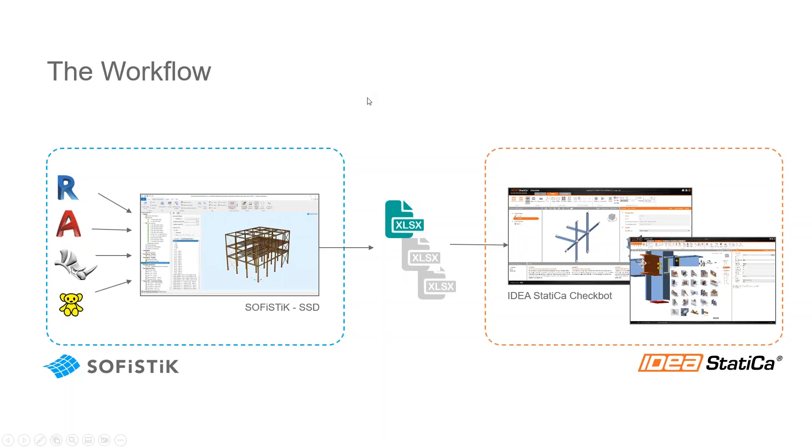As already said, the exchange format is the Structural Analysis Format, SAF. It's a format which was set up a couple of years ago, I think 5 years ago, based on an initiative of the Nemetschek group to facilitate the cooperation between structural engineers, mainly led by the software vendor SCIA. And the focus, in contrast to IFC, for example, is entirely on analytical models, to exchange analytical data between analysis softwares.

So, for example, you can define analytical beam members, shell members, surface members, together with boundary conditions, loads, results, all you need to do an analysis. And what we really like in that format is that it is based on Microsoft Excel. So you can already read that data, and you could also modify that data if you want to. There's also an extensive documentation, so if you want to check the transferred information, you can check that documentation, which describes all the parameters and information in more detail.

So what will be transferred to IDEA in that specific case for doing the connection analysis? It is materials, of course. You need section information, so the cross section. Then you need the linear members, either of the full geometry or of a partial geometry, with all the properties and geometry. You need load cases and the forces along the member. So that's what we are transferring to IDEA StatiCa. We will see that later in detail.

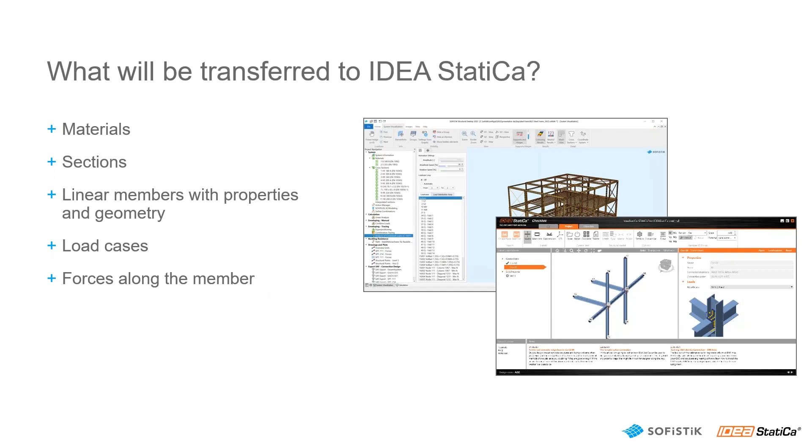Let me say some words about materials and sections. Basically, if you use standard materials and standard sections, they will be automatically recognized in IDEA StatiCa. So we defined a number of steel profiles here, and these steel profiles will directly show up in IDEA StatiCa Checkbot on the right-hand side. And of course, you could also modify them later on.

Also, a question which is asked quite often: eccentricities of the members will be considered. You can define eccentric members in SOFiSTiK, either through an eccentric cross-section or by defining eccentricities on the member itself, and all those eccentricities will be transferred to IDEA and recognized there. But it's also possible, and I think you will see that today, to modify the eccentricities. So you can do an analysis with centric positions of all the members in SOFiSTiK and then add eccentricities later in IDEA.

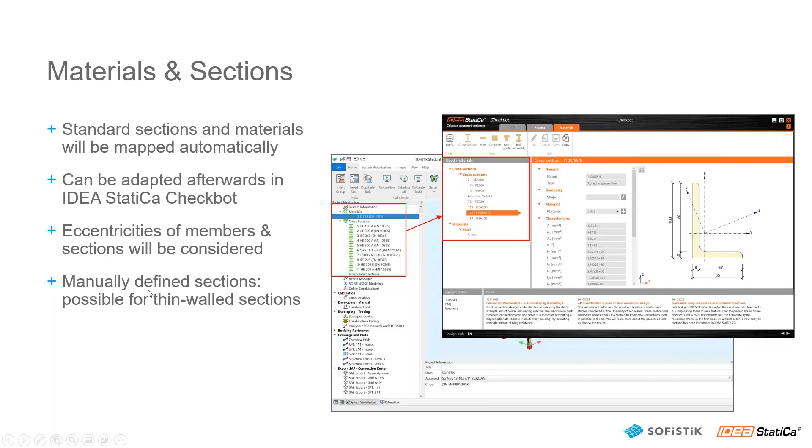And what we think is interesting, especially when you work with SOFiSTiK, is that you can do very complex geometry and sophisticated nonlinear analysis, for example grid shells. In those cases, you might not always use standard profiles, so you might want to define your profiles manually. In SOFiSTiK, we provide a number of options to do that. We have a graphical preprocessor where you can model any profile, like this composite profile, which has been put together from a couple of HEB profiles.

That kind of profile can be transferred to IDEA, but there is one thing you need to consider. In SOFiSTiK, we provide two ways to analyze those profiles: the thick-walled definition and the thin-walled definition. Thick-walled means you define your profile by the outer boundary, and the analysis is performed based on surface integrals. But you can also define profiles using lines which are welded together, and the analysis is done on line or curve integrals.

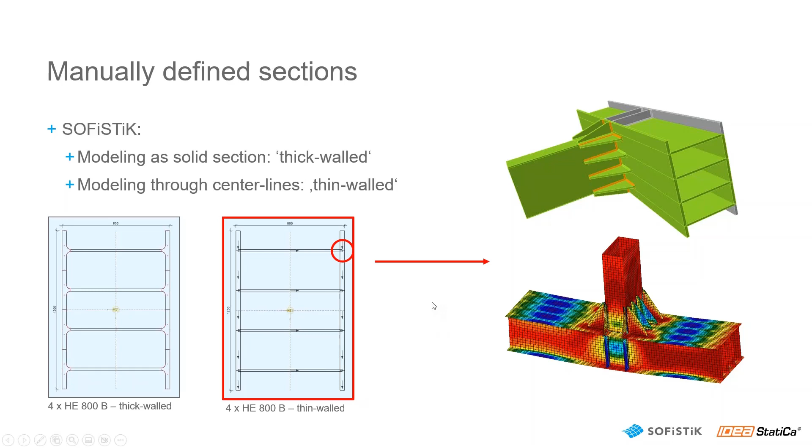For IDEA, if you want to transfer that data, right now only thin-walled sections can be used. So you need to consider that when you want to transfer complex manually defined sections to IDEA. But if you do that, any kind of shape is possible and can be designed in IDEA. So I think that's a pretty nice feature.

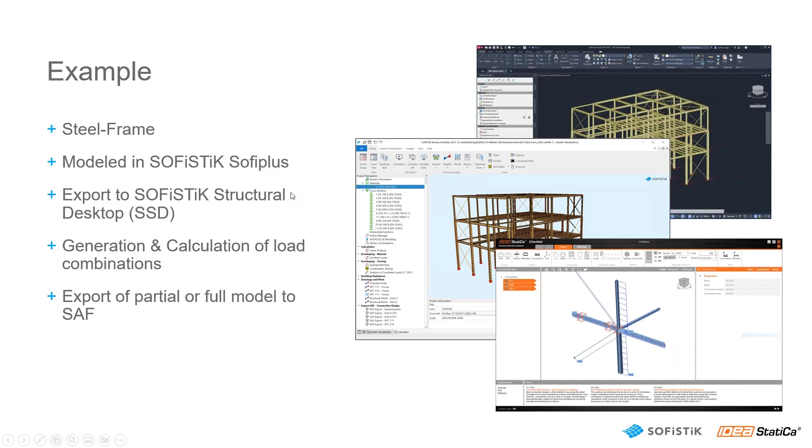So I'm already through my PowerPoint slides, and I'm switching now to the example. The example I want to show you today is a steel frame which we set up here. We modeled that steel frame in SOFiSTiK SOFiPLUS, and then I will show you how you can do the combinations and later on export that data to the SAF format.

So let me switch to SOFiSTiK SOFiPLUS. So this is the preprocessor. I already set up that structure. So you see here all the members, and I'm just switching to 2D wireframe view. And let me just select one of these members. And then you can see the properties of that member.

So for example, the cross section here is assigned, and we also have beam hinges, so moment hinges, so they are not transferring moments on that specific member here. So all that stuff can be modeled in SOFiSTiK SOFiPLUS, of course. Also, we already set up a naming to the members so that you can find them later on.

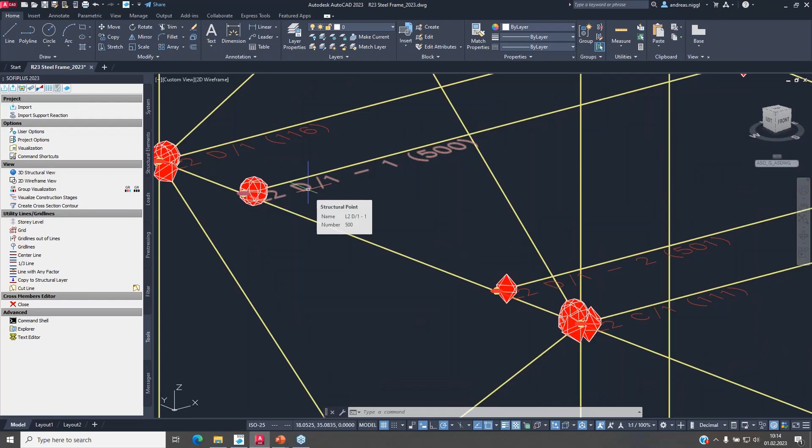So for example, we will see later on one of those interior nodes will be transferred to IDEA. So I think this is this one here. That node here will be then transferred to IDEA StatiCa.

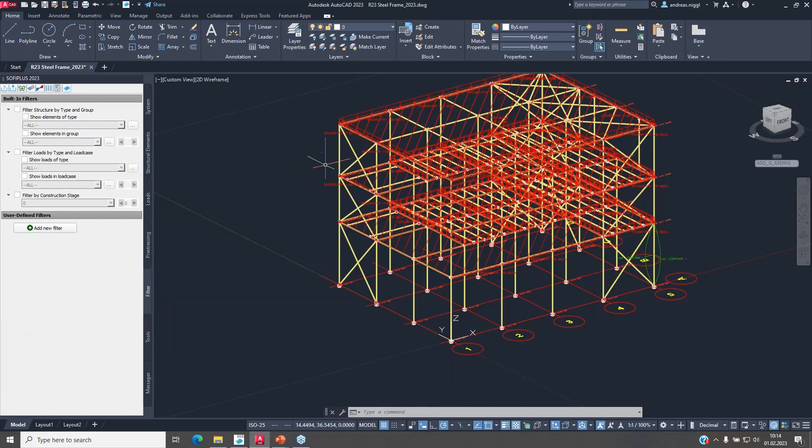In addition to the structure, we also set up loads. So you can see here the loads. So we defined self-weight, additional self-weight, live loads, and so on. And as for the live loads, we also defined the live loads in a patterned loading scheme.

So you see here different patterned loads, which we applied using so-called load distribution areas. So you define this load distribution area, which then transfers the area loads to the specific members in SOFiSTiK.

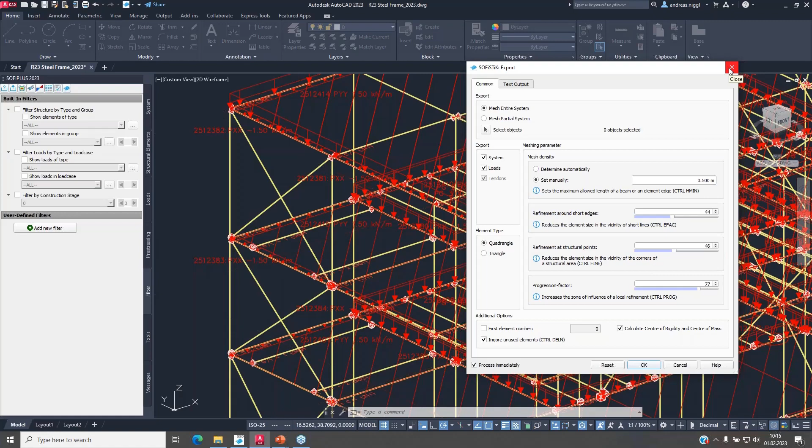And once we set up this structure, we can export that structure to SOFiSTiK Structural Desktop, where you can define the kind of elements being generated, but I don't want to go into detail here. I'm just switching now to SOFiSTiK Structural Desktop, where I already exported the structure, and I also already calculated the linear load cases here.

So you see self-weight, for example, you see snow loads, or you see these patterned loads applied to the members here. But in order to do a design, of course, we need to combine the loads. So we need to factorize the loads to get design forces. And in SOFiSTiK, there are different options to do that.

So you can either do an enveloping, but for this kind of steel structure, and especially when you want to transfer the decisive forces of a specific member, it's better to do explicit load combinations. So we are combining the loads. But before I do that, just a few words on SOFiSTiK Structural Desktop, which you can see here.

So in SOFiSTiK Structural Desktop, the entire analysis is organized in so-called tasks, which you can define totally freely. You see here, we have a couple of tasks for calculation, for doing the combinations, for local checks like buckling resistance. You can also define all the post-processing, so creating drawings or text outputs here. And I will do that later. You can also automate the export to the SAF here using a task.

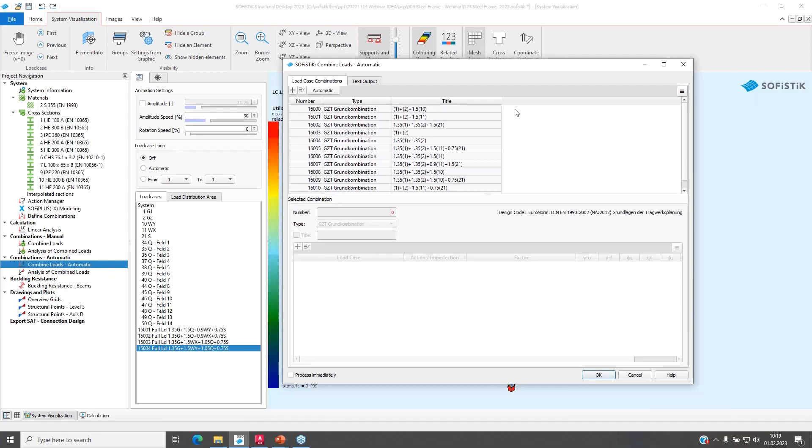So for example, there will be that combination which is decisive for the normal force, for the moments, and so on. So using that feature, you can calculate the combinations which are decisive for a specific node, for example. I don't let this being calculated right now to keep it simple.

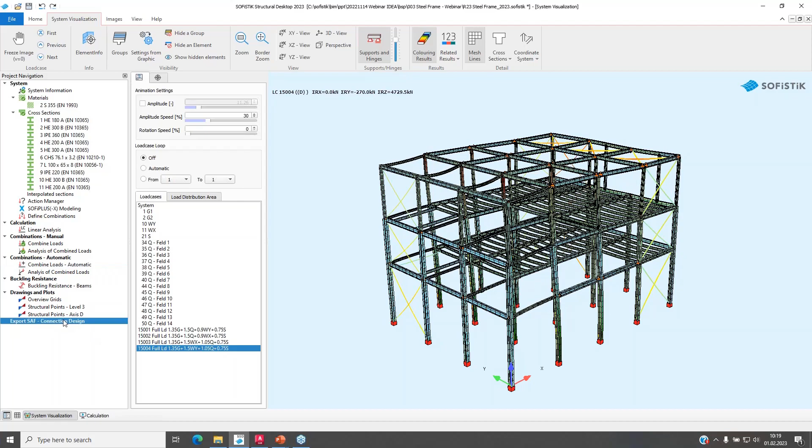Yeah, and once you did the load combinations, you do the analysis, then of course you might want to do some post-processing, but in order to do the design in IDEA StatiCa, you can now add a task, which I do right now, called SAF export. Just let me check out the model. I want to pick this specific member here. Just let me select that member.

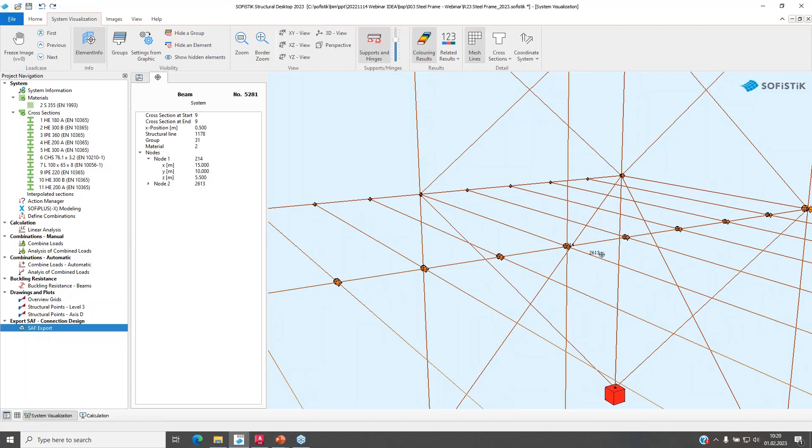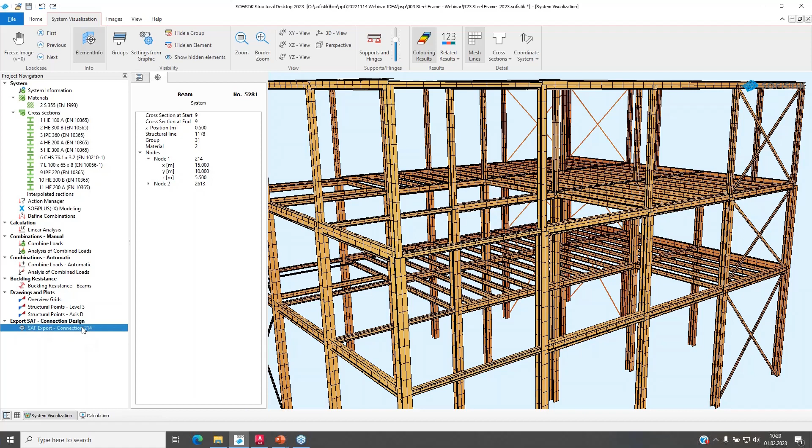This is node number 214. So you can see it here. I'm switching off the supports and hinges. So you see here, this is node number 214. And I will pick now this node number 214 first. So I just rename my task here and double click the task.

And in that task, I can either select the lines being transferred or the points. So I'm using here the points, 214. I can select that point here in that dialog. And then I need to select the load cases which should be transferred. So I'm just using those combined load cases which I already calculated.

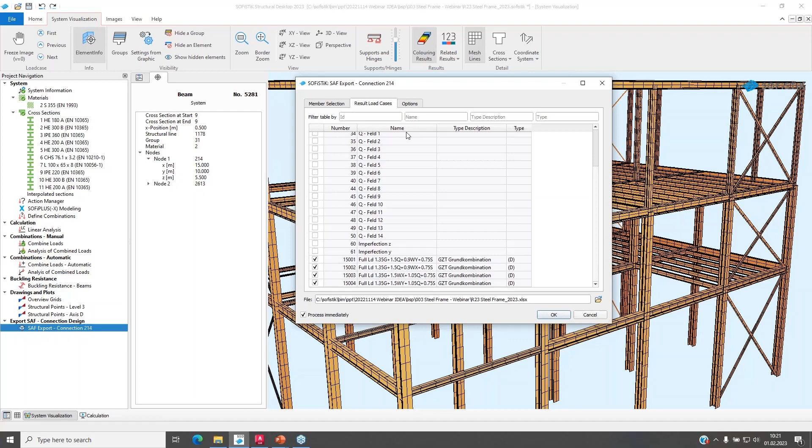And in the options, I can specify what kind of coordinate system should be used in the SAF file, because in SOFiSTiK we are using a different kind of coordinate system compared to IDEA StatiCa. So there needs to be some transfer of the moments and also the geometry when you do the analysis in IDEA StatiCa. But this setting is being taken care of here.

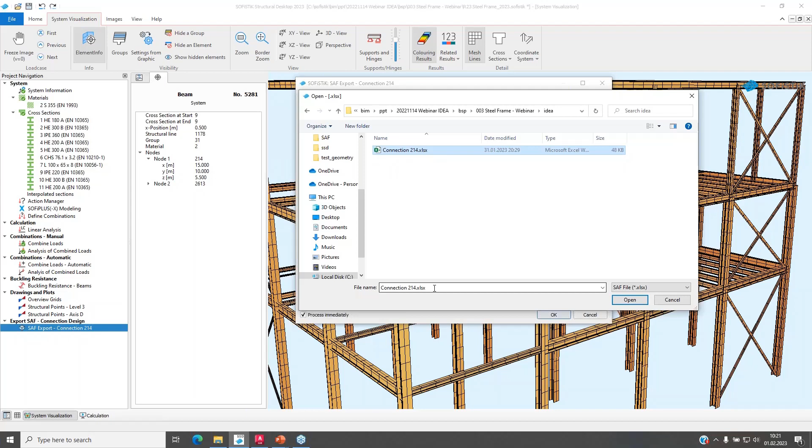And then I need to select an Excel file. There's also an Excel file here, but I select that connection Excel file here, which will be overwritten later, and then clicking OK, the file is being generated. Same can be done. I'm adding another task here for the SAF export for exporting the full model.

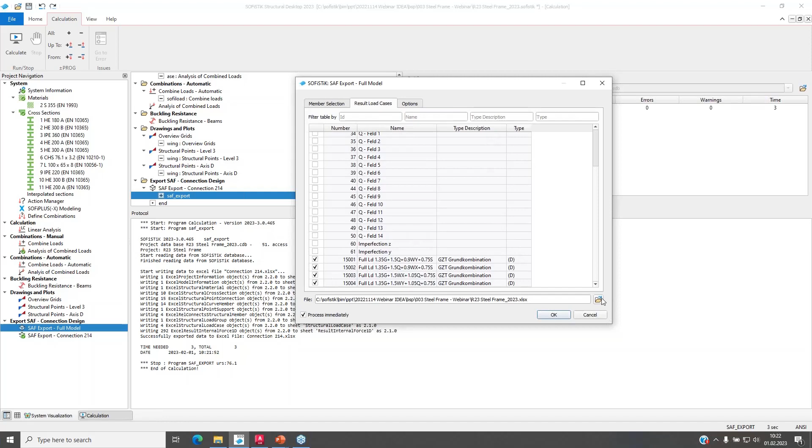So in this case, I'm selecting all structure lines in my system, same result load cases. Options are the same, and I'm just adding here full model.

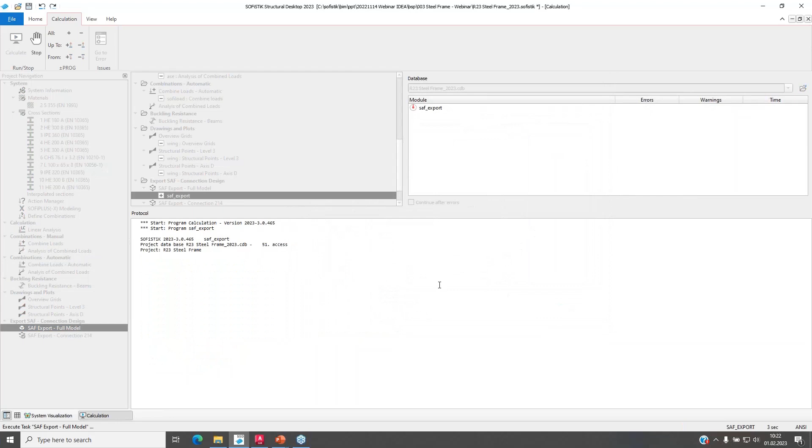All right, so we already automated that export now using those two tasks, and as already said, once you set up this workflow in the SOFiSTiK Structural Desktop, whenever anything changes, the loads or the geometry, you just need to recalculate the entire system, and the export files are being automatically updated.

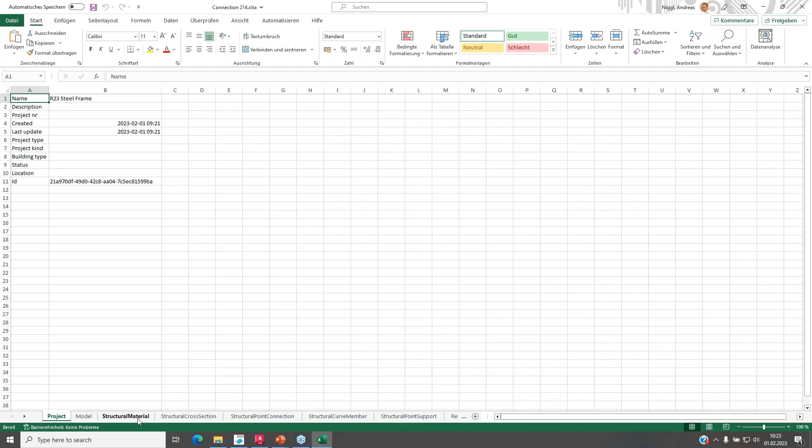So let me now switch to that file folder where I already exported that data, and let's have a quick look at the Excel file before I hand over to Adam. So you see here, this is the exported file where everything is organized in tabs. You will find a tab for the material, a tab for the cross sections, and here the structural curve members. So these are all the members which are joining at this common node 214.

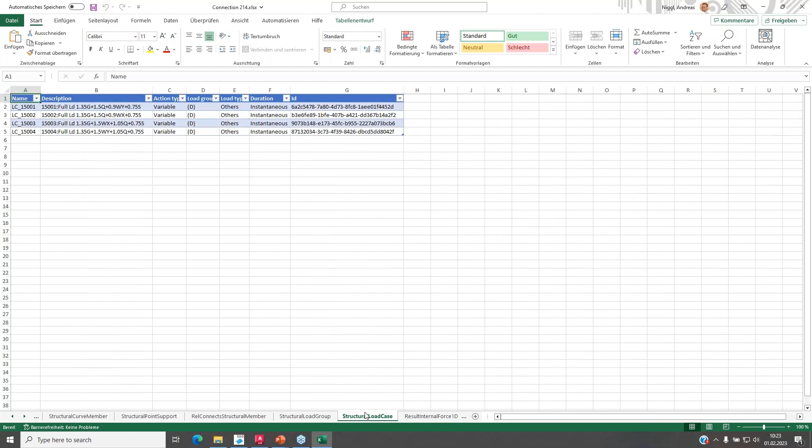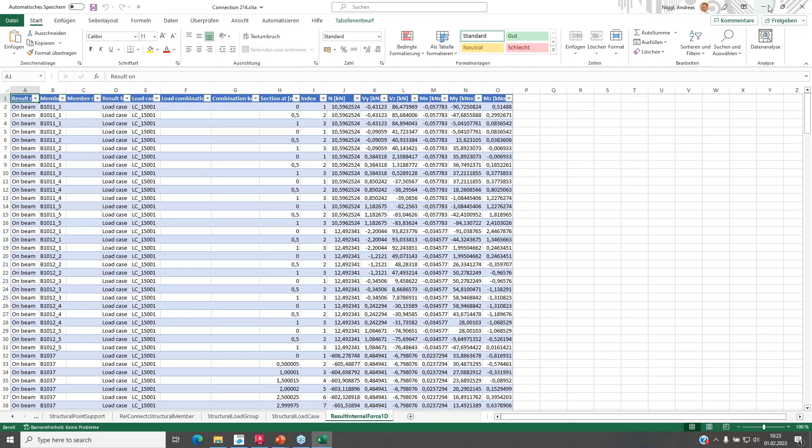And supports, load groups, load cases, and here you will see all the forces acting on that member. So you could also filter it and so on. So this is the information we are now transferring to IDEA, and I can hand over to Adam now.

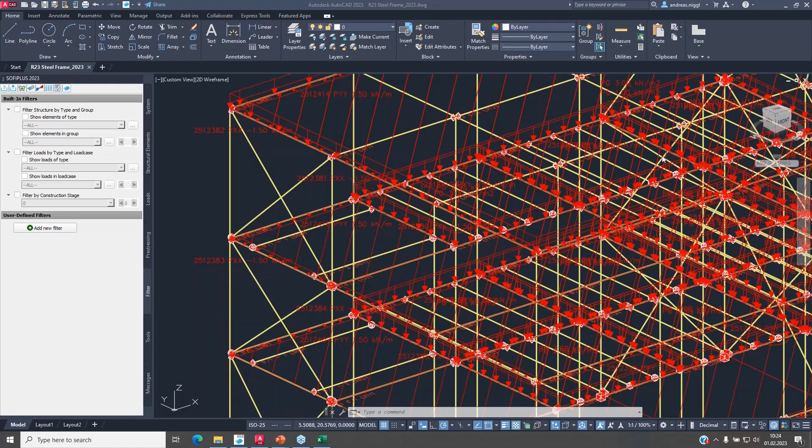Yes, thank you, Andreas, for your part describing SOFiSTiK, and I will now continue. Take the presenter and show my screen.

So I'll continue with the story and start with the introduction to the Checkbot application of IDEA StatiCa that you can see right now. To get familiar with the application, I have prepared the import of a SAF file of the whole structure that Andreas was showing to you in SOFiSTiK. It's already here, since the import of such a bigger structure takes approximately 1 minute to get it inside Checkbot. So I wanted to save your time and have it prepared.

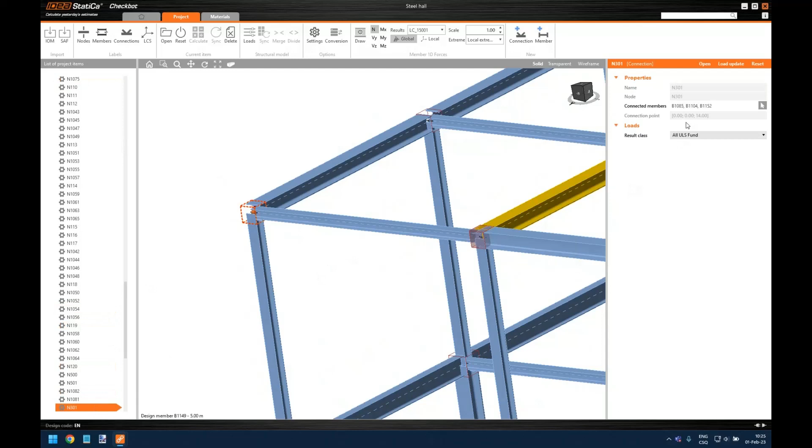So let's have a look. You can see clearly the structure is there in the 3D window. You can, of course, play with it, select all its parts. On the left panel, there's a list of all the connections. If I click on this one, for example, which is number 301, it gets highlighted. You get the information about the connected members and so on.

You can somehow edit this as well. And I can also, for example, highlight more of those connections and do some actions with them, like I can delete them, reset their settings, and so on. So this is how you handle the list of connections in the 3D model.

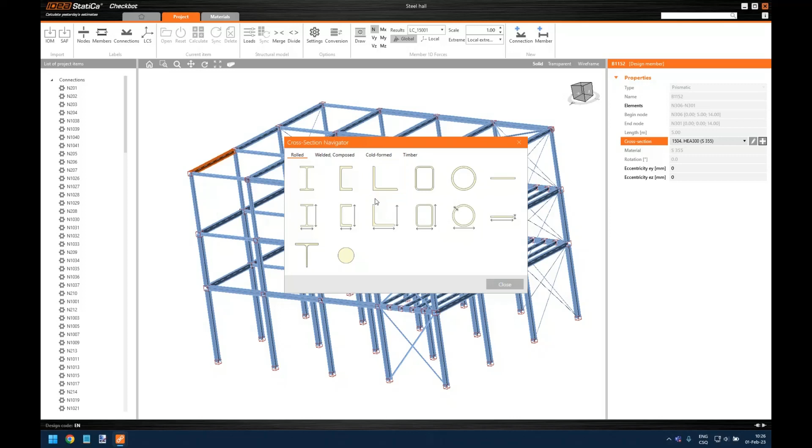About the imported geometry, if I, for example, select one member or beam of the model, I can also see the information. Some of them are grayed out, so they are not editable, like the begin node, the length of it, material. The cross-section can be edited, so you can further optimize the whole structure in the Checkbot by, for example, changing the cross-section to another one. Or you can also modify some of the parameters of the already imported cross-section.

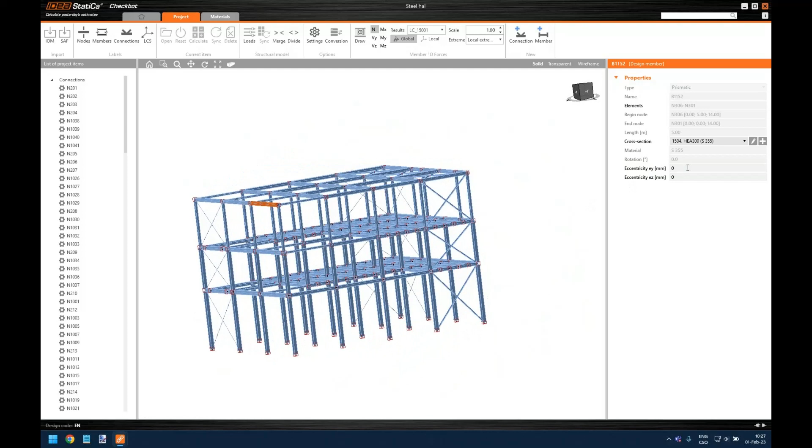And then something that Andreas was pointing out, the eccentricities of members are imported via the SAF file. If they are missing there from the global model, you can introduce them in the Checkbot right away. So for example, if I select this wind bracing rod, which should be moved slightly up, about 10 centimeters, I can do it easily like this. So this is about the eccentricities.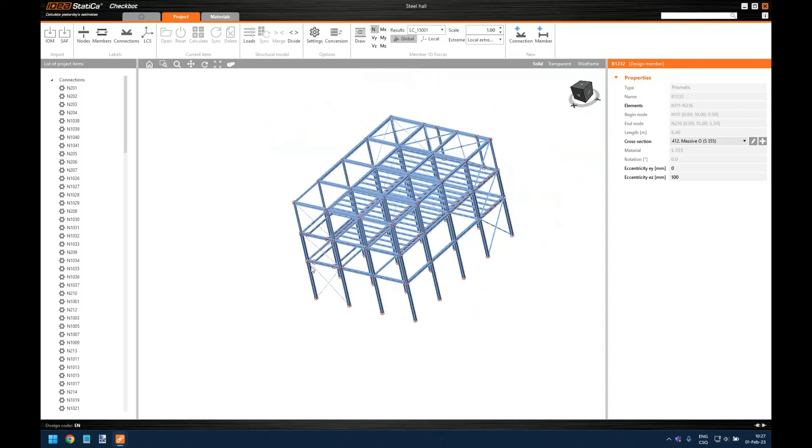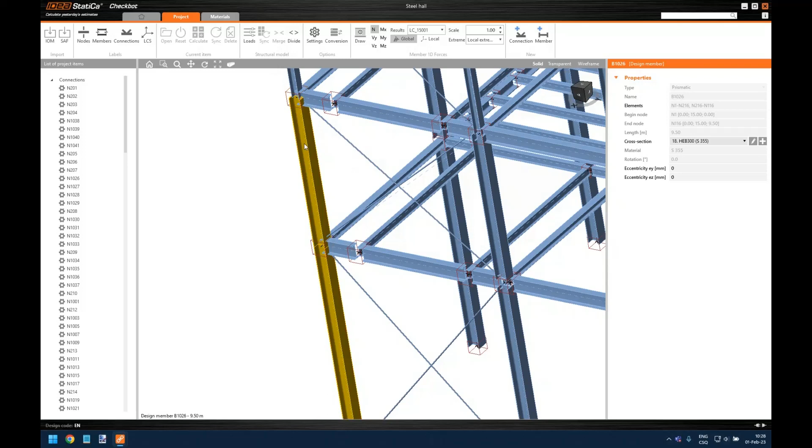And then about intermediate nodes. This is also something that can be imported via the SAF file, if it is set in the original model. That means if you have, for example, this column that should be a continuous one and there is an intermediate node, you can merge the column into one piece by using the merge command from the top ribbon. Just select the other member and you can see now this is one piece as a continuous column. So either you get this information already in the SAF file and you can see it right away, or you can do it manually in the Checkbot. So those are the options of editing the geometry and how to move around.

And one more thing is about the loads. There is a load configurator, so let me spend a few words on that. On the left panel, you can see all the load cases and possibly load combinations that are part of the structure and the global analysis. Automatically, by default, one result class is created in the Checkbot once you create a project. Here you can find by default all the combinations. If there are no combinations, then you find all the load cases here. And this is what is used for the analysis of connections and for the calculations in IDEA.

If I select this result class, I can change the name and so on. And I can also turn on this evaluate critical effects. This is, in short, a filter. That means if you have, for example, 80 combinations, that's a lot, and the calculation time of the analysis of each connection is rather longer because you have to calculate all those 80 combinations. But if you turn on this filter, it filters out and doesn't use for the calculations those combinations that are not dangerous, and rather picks up only the extremal combinations that are useful or dangerous for the analysis and code check of connections.

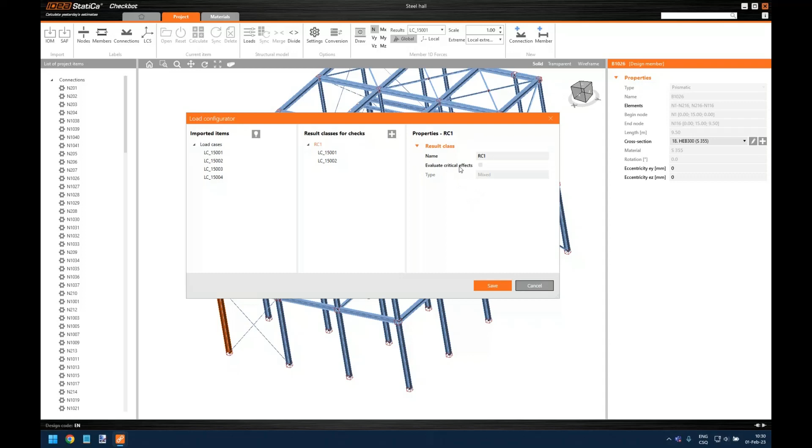So if I close this, if you want to read more, for example, about this feature, there is a help search window on the top bar of the Checkbot window and our applications, which opens the website of IDEA StatiCa and its support center, and it directly shows you possible articles containing the information. So for example, about this feature, you can read this article where everything is described. So this is one useful tip for you. If you don't understand something here, you can find the help. Obviously, you have to be online for this, but I hope that's not a problem nowadays. And I think that's it for the introduction to the Checkbot.

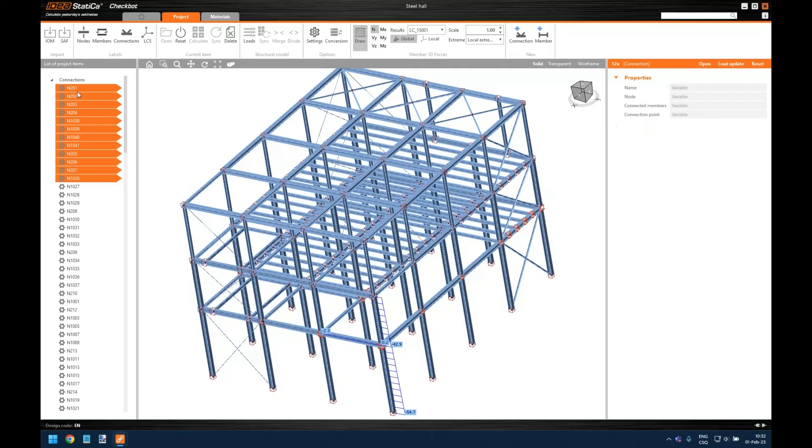Maybe one last thing, you can also check the internal forces here. You can draw them in the 3D model, and for example, if I highlight a few of the connections and switch to wireframe view, you can then browse all the load cases and combinations and compare with the original model, or just check if everything is all right and what is going on for each load case or combination. All right, that's it for the introduction. And now I will simulate the workflow. The last thing that Andreas did was that he generated the Excel files, the SAF files containing the data.

This is what you can see on my desktop here. And I will now work with just one connection, the number 214 that he generated. So this is a new Checkbot window. I will generate a new project. I name it Steel Hall Connections, or maybe connection 214.

And I can select the design code under which I want to perform the code checks of the connection parts. So for this time, it will be Eurocode, and create the project. So now I have a blank Checkbot application, and I can click on this icon, import SAF file, and just navigate to the XLS. Click OK.

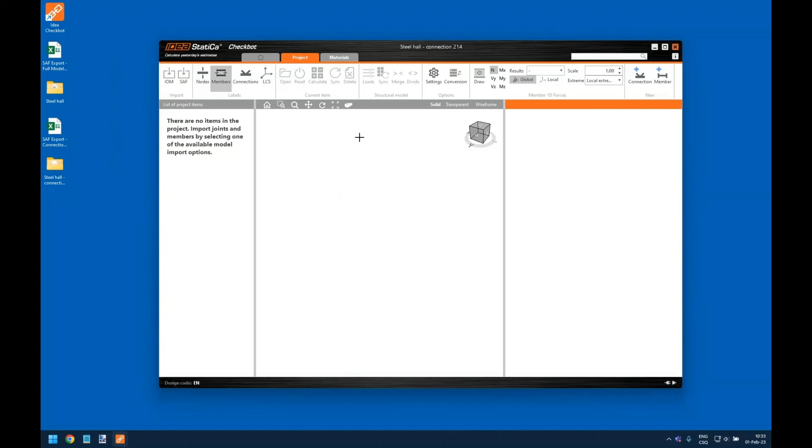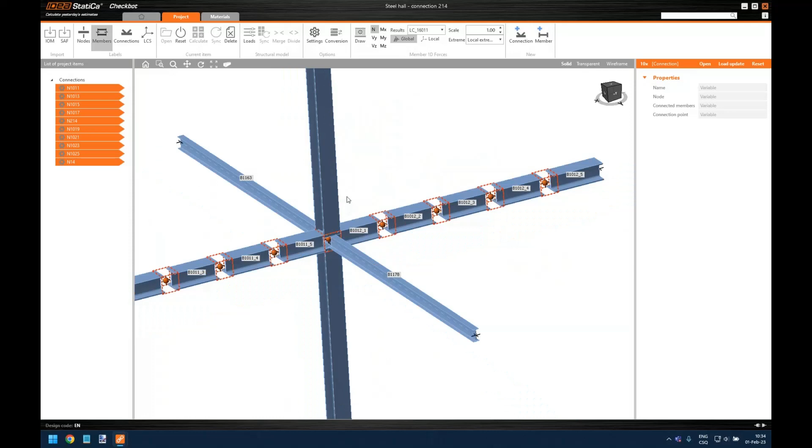Now the data are being read, and in 3 more seconds or something like that, we will see this connection in the Checkbot. So I will maximize this now, and this is the connection Andreas was focusing on. This is something that he wants me to work on, to design it and code check it.

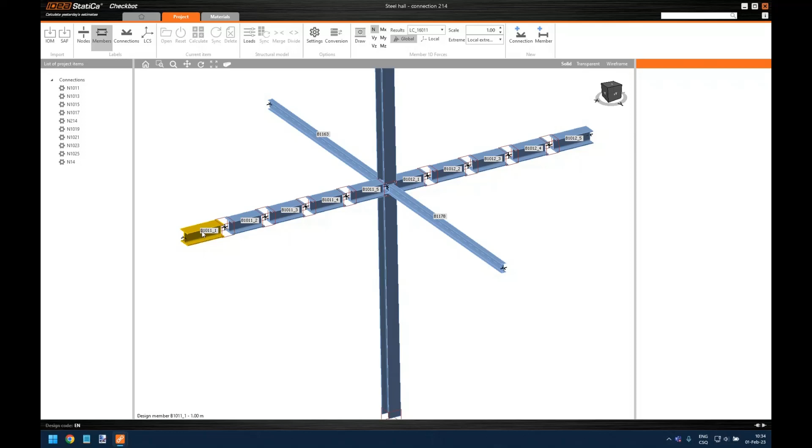All right, so what I will do now as part of our workflow, you see this beam and this beam is separated with intermediate nodes, so I can easily merge them now by using the merge function. So I'll start with this one, then select another beam and select all these 5 parts of the beam. And I will also merge the column.

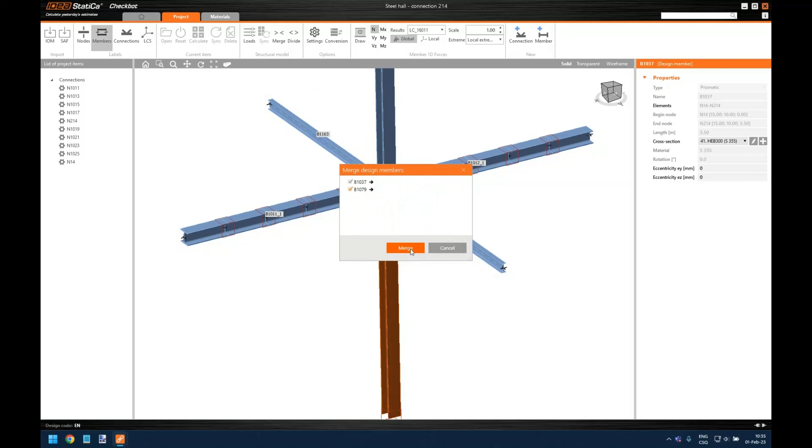You don't have to be afraid of losing the internal forces or the loads on the model. It is automatically regenerated according to the merging that you do. All right, so this is now prepared. What I would just do now is to select a node either from the 3D window or from the list. 214, and I can open it.

Open means the application IDEA StatiCa Connection opens, which is embedded inside the Checkbot, but you can also, of course, use it as a standalone application. So now you can see here is the column and the two beams and the side beams.

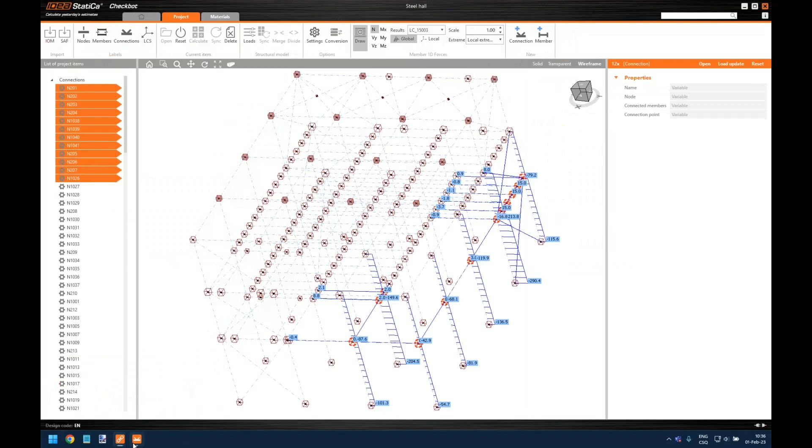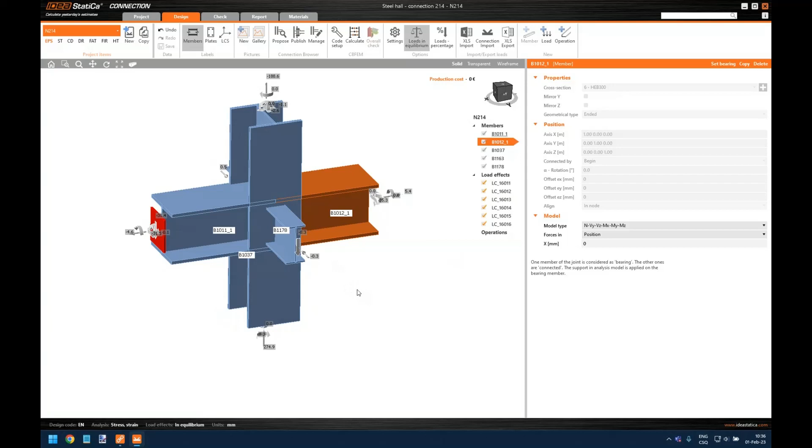About the geometry, the comments are just that you can see this is all grayed out because it's part of the global model of the Checkbot. So changing data here could corrupt the whole model. So all the changes are being done in Checkbot, in this case, not in the connection file. But I will show you at the end how you can override this and maybe use a single connection project for optimization and experimenting. So that's for the geometry.

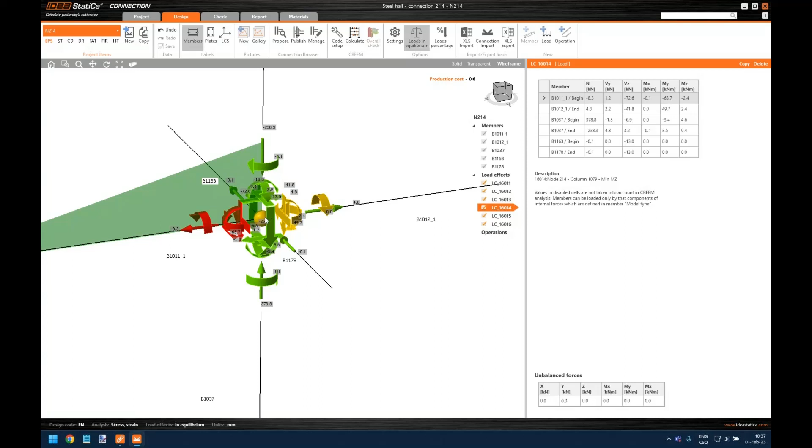Then we have here the load effects. These are the load cases that are imported from the SAF file. You can see the description here as well. This is, for example, a combination or a load case representing the maximum normal force. There is minimum moment in Z direction and so on. You can see the values of internal forces. Those are the nodal internal forces that are actually results from the global model in SOFiSTiK.

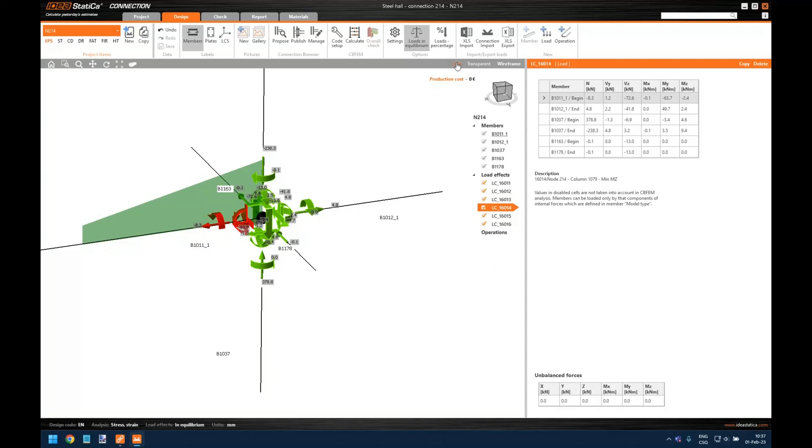And in this tab on the bottom, you can see this is a visual check of unbalanced forces. This should be by the law of statics all zeroed, because that means the node is in balance, which of course it is.

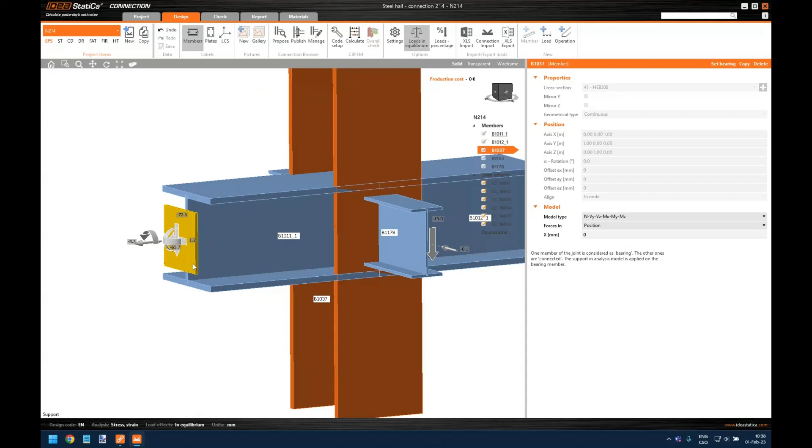One last thing maybe for the geometry and the settings before I start the design is that there is a bearing member on each connection represented by this red square. This is automatically set to the strongest beam logically by Checkbot, but you can also change it to any other beam. After all, it doesn't matter. You can read about bearing member in the support center on our website. So here you can enter the keywords and articles will pop out.

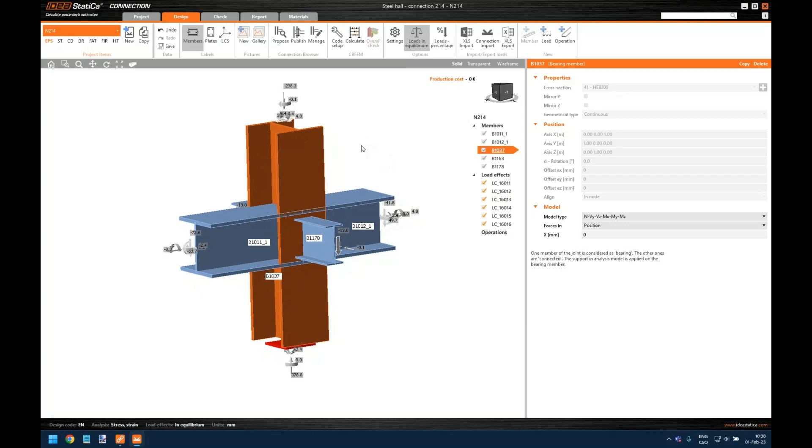So I will continue now with the designing. For designing connections, we have more options. In IDEA Connection, we can use the manual operations. You can do it by this command or right-click on this operation and click New Operation. This provides you a list of possible connection design operations, from the complex ones that generate more things, meaning end plate, bolt, weld, cuts, etc. at one time, or simple operations that produce just a simple cut or one bolt. So you have more options how to do things.

So this time, for example, if I select a stub, I will say what is the default size of my bolt, which can be modified anytime for any operation or any connection between any beams. This operation is now generated. I can see its parameters and I can, of course, modify them.

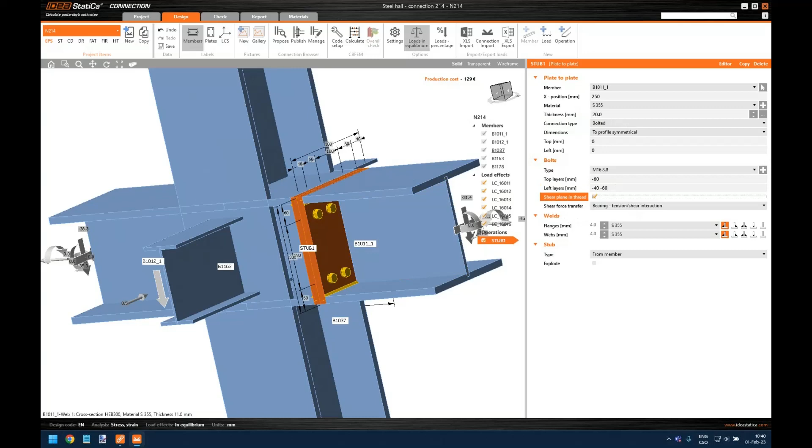Say, okay, I want these end plates to be thicker. I want to move the bolts slightly up. I want to add one more row of bolts like this. Change the weld side, position, etc. So this is how we work with operations.

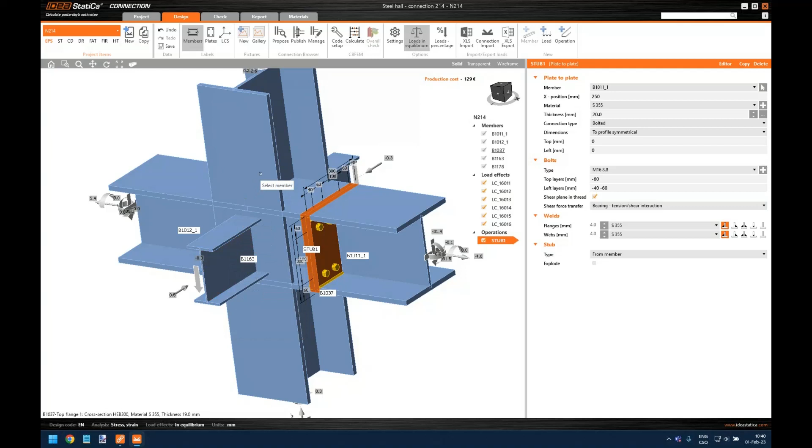Another possibility is to use the right-click button to generate a connection between two members, maybe an easier way. So I'll say, okay, I want to connect this beam to this column, and this connection design browser opens. That gives me possible options how to connect these two beams and generate, for example, some strengthening panels, stiffeners, wideners in just one click.

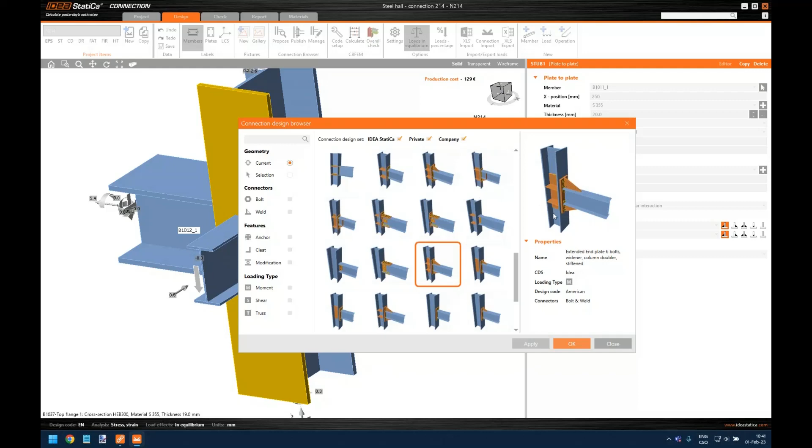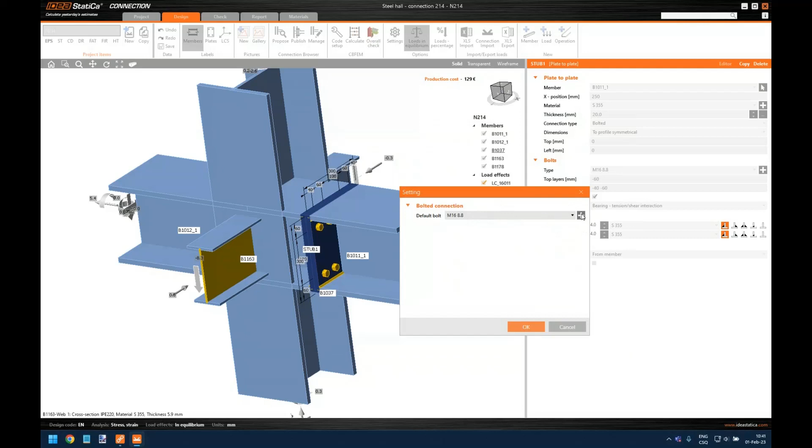I can filter this out. For example, I want this connection to be bolted, and I know that is a shear connection. There is no moment, so I want to probably use just a fin plate. I can confirm this bolt, or add a different size, whatever. I can of course change it later by adding a new bolt assembly. The fin plate is generated like this, and I can work with it, changing the parameters. So those are the options.

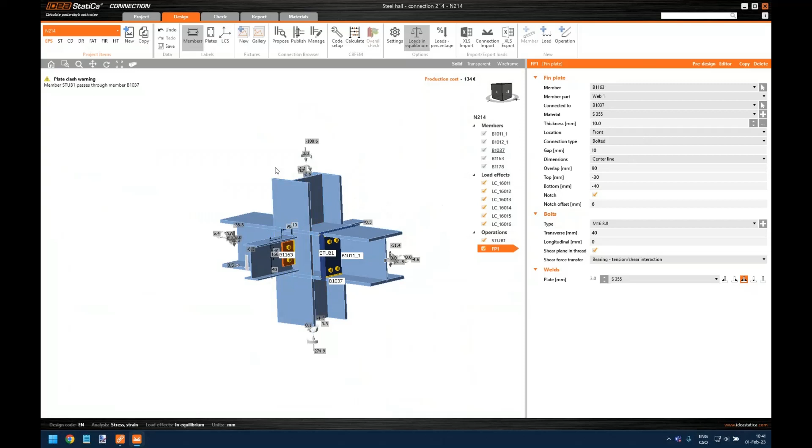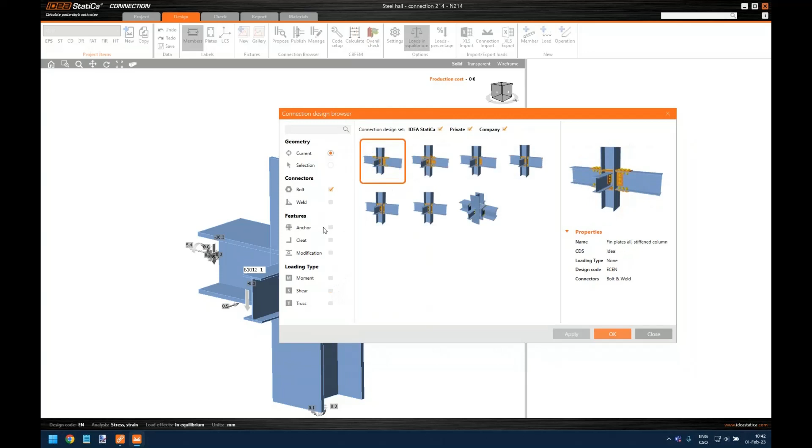One last but not least, I saved the best for the end. I will clear all this and use the connection browser. This is a rather new feature. If I click on propose, that means show me possible designs, and unclick the filter here, I can see the possible design templates that are saved in a cloud and proposed to you. It reads the geometry of your connection of the node, the profiles, its orientation, its number. There are some tolerances, and it gives you examples you can use right away, saving time instead of adding operations one by one.

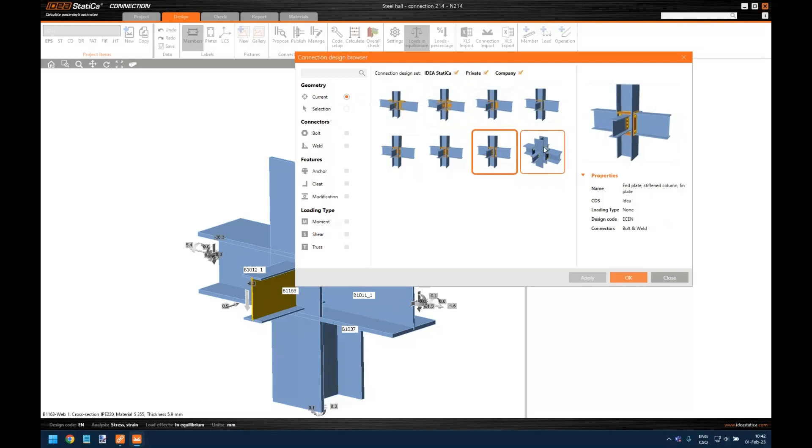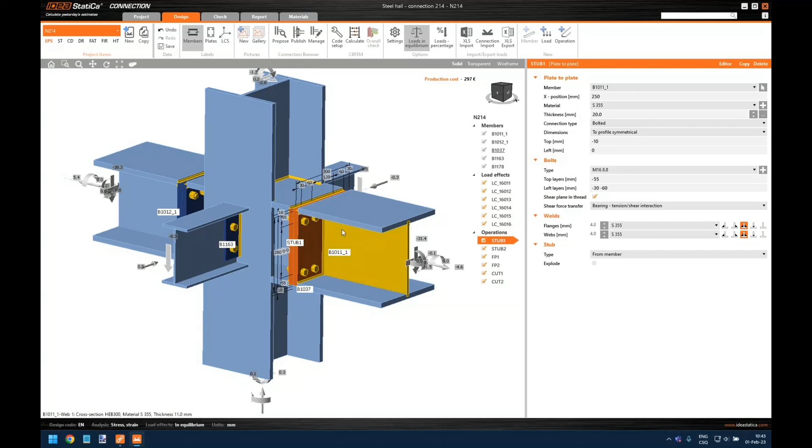So if I select one, click OK, again confirm the bolt assembly, I have at one click this node designed. Of course I can say, all right, this is good, but I want thinner plates here and a different position of bolts. Everything can be edited as you wish. That's the connection browser and how to call quick design proposals.

One more thing I want to mention is that this is a fully finite element model based on shell 2D elements. We work here with internal forces that are in the node. For example, here we have a fin plate that represents a hinge, a pinned connection. That means the center of rotation is where the bolts are, right?

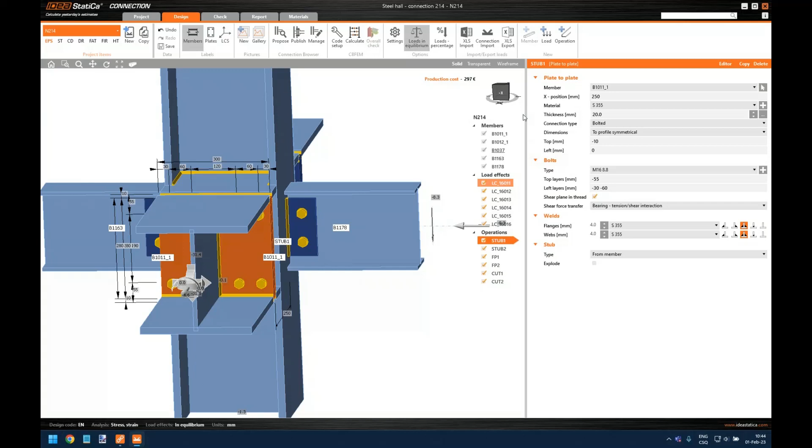If I go to display, select one load case, display the wireframe model, and select this beam and give a side view, you can see the moment diagram. The moment is simplified, or simply the diagram generated from the shear force is a linear distribution. In the default case, where the shear force sits in the node, we have a moment in the bolts, which is actually not correct, and we have to manually adjust this, because here the center of rotation is in the bolts, meaning the moment of zero is in the bolts as well.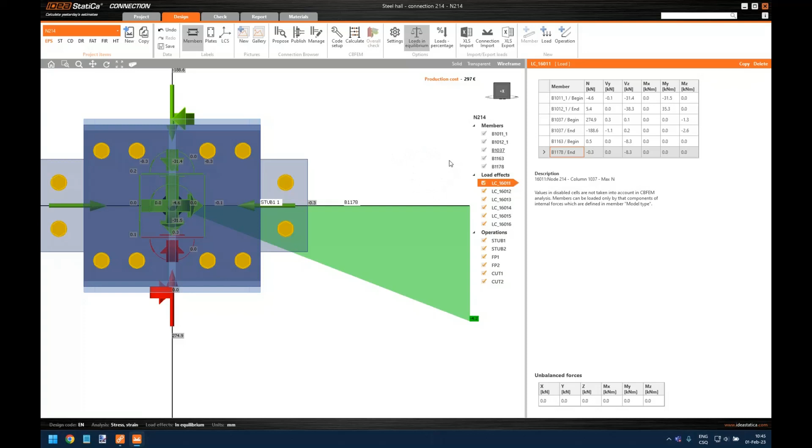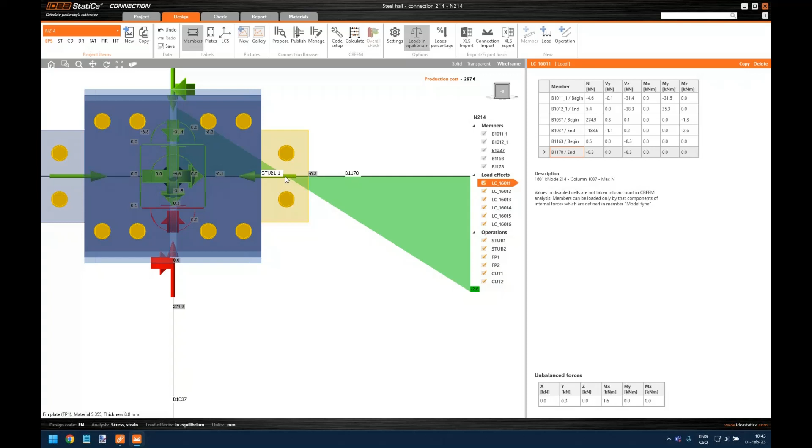How can I do this? I click on this member, go to its settings, and here I change the forces in from position or node to option bolts. So if I go back and again show the moment diagram, now I have shifted the shear force into the position of the bolts, and so the moment diagram is changed and the zero moment is in the bolts. This is now the correct setting of this finite element model of this connection.

And I do the same for the other beam. Now this is prepared for the calculation. Of course, you can read about these forces in our support center and get more information and insight.

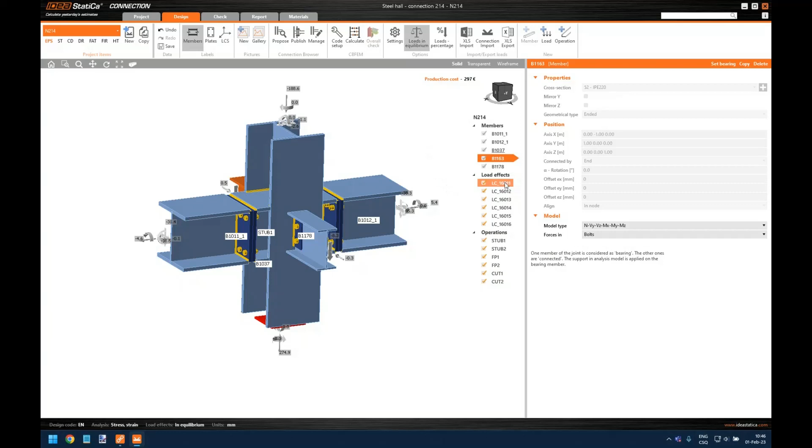Now I can push the calculate button. I will just do one trick to unselect 3 or maybe 4 of the load combinations, so we don't have to calculate all of them and spend half a minute more on this. By pushing the calculate button, the finite element analysis starts and calculates all the selected load cases and gives you the result.

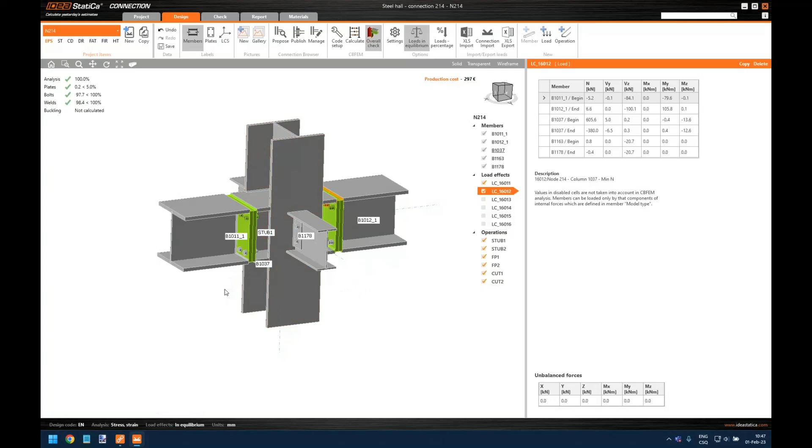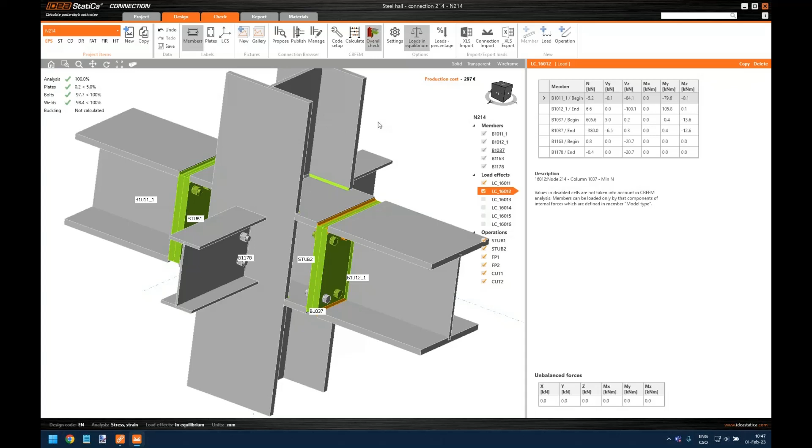So now I can see on the left side a short version of results. First, I have a visual control, a visual check. I can see my connection colored. Most of the parts are gray, meaning the utilization of these parts is less than 60%. What is green is 60 to 95%, yellow is 95 to 99%. What is over is colored in red, meaning it fails the code check and is not strong enough. You can see this summary of results here, and I can navigate to the check tab to see detailed results. For plates, if I click on this stub plate, for example, it gets highlighted in the list and I can see its values.

That means the stress, the maximal stress, the maximal equivalent strain, and this is now easily compared to the code requirements. Eurocode says for plates the equivalent strain must be less than 5%, which we fulfilled here. You can see there is some plastification, but still it's under the limit.

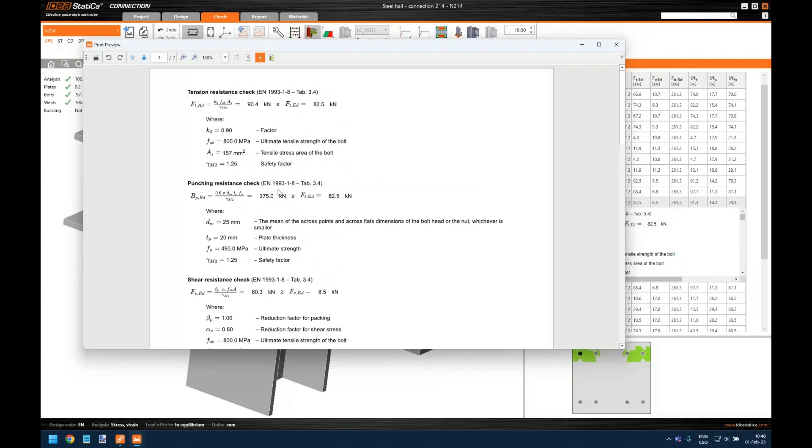For bolts, if I click on this bolt, I can see also the values of forces, the utilization ratio. If I click on this plus icon and right click to print the bigger preview, I can go one by one of the code checks that are required by Eurocode, see the values that are used for the code check, and I have a perfect control of what's going on.

Similar thing is for welds. Again, I can see the values. I can see also the distribution of stress along the weld elements. I can show you how, for example, this one, if I click on it, you can see the weld is divided into finite elements. Each of them has its own stress and strain values, and also, of course, the equations as per code.

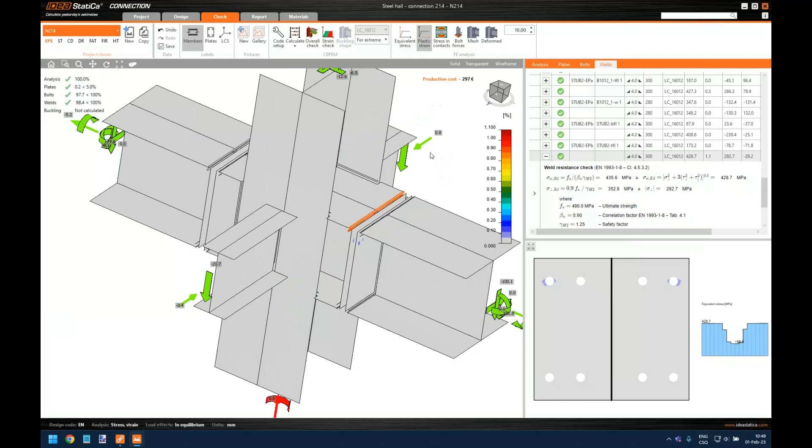And what more I can do, this is a useful thing - I can have also visual control by checking the deformed shape of the connection, so I can see what's going on.

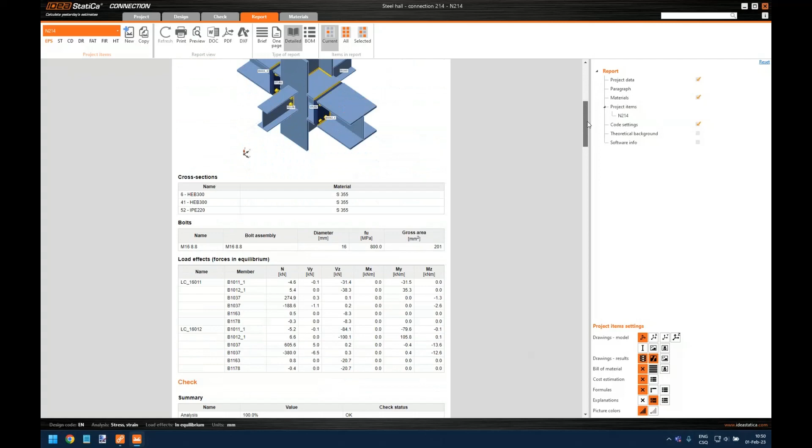Also a useful feature. Then the last step is to print out the report. The report can be customized, so I can select what I want to have here. I can have a short report or a very full report, and it contains all the necessary data. I can add bill of material and some of the code formulas, refresh, regenerate the report.

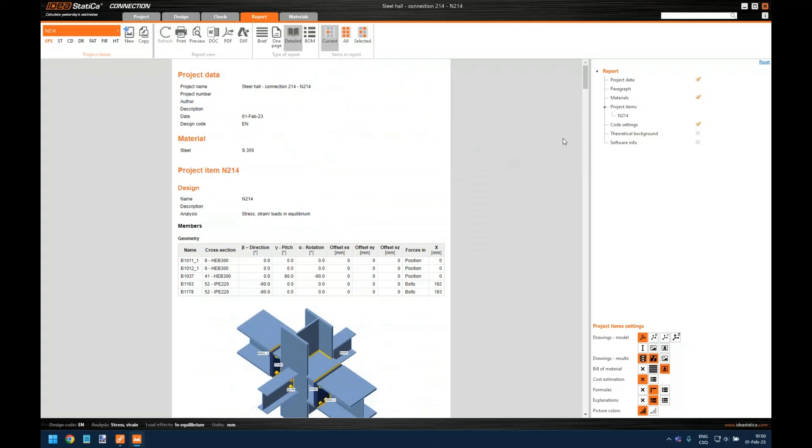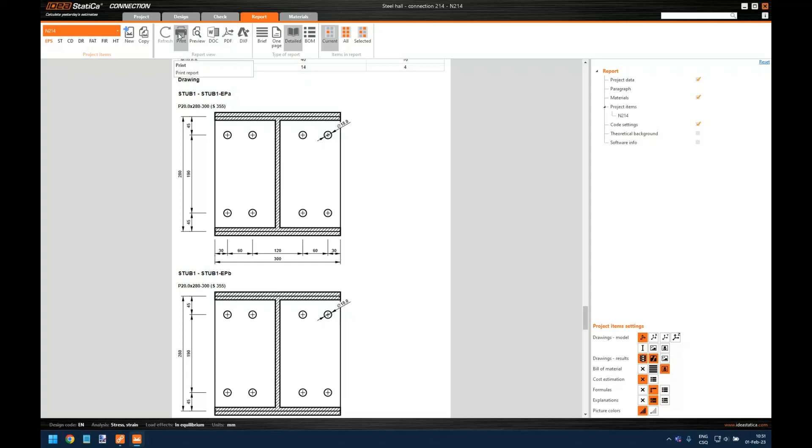So now it will be slightly longer. It will now contain the formulas from the code for bolts, also for welds, and also the bill of material that says how many plates of what sizes, and also some basic drawings. And I can save this into doc, so editable format, or PDF as I wish, or just print it out directly. All right, so I am now at the end of the journey of designing and code checking a connection.

So once I'm done, I save my result, and I can see on the list that this is checked or marked with a green mark, and I can see the summary and the picture of the design here in the checkbot, and I can continue with other connections and finish the job.

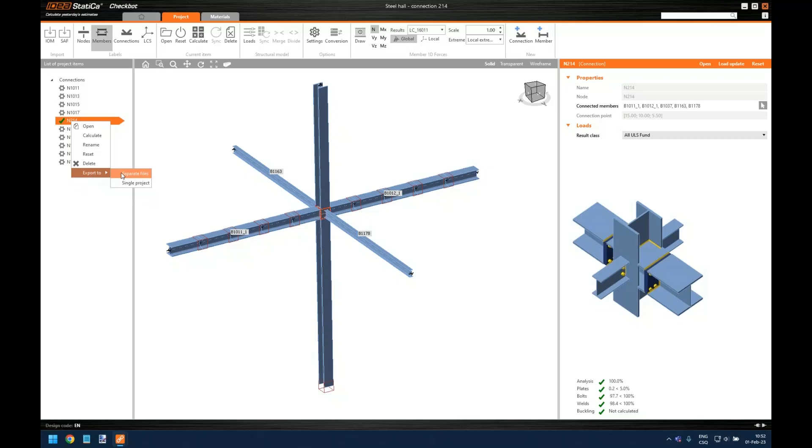All right, and the last thing I wanted to tell you is if you want to experiment or optimize a single connection, you can save it by using this command, export from checkbot to a single project. You can name it and save it to my desktop. So if I minimize it, now the file is here, and this is now independent from the checkbot project, and I can work with it as with a single connection, open it directly in a standalone connection application.

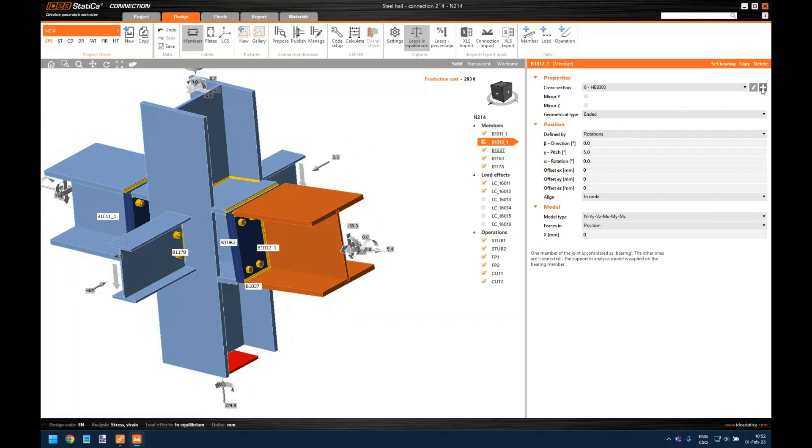And now I can, for example, change all the geometry. I can say, okay, what happens if this is now tilted, and what happens if I change to another cross-section, and I can do some, let's say, optimization and recalculation now and so on. So this is another possibility. And that is the last thing I wanted to show you.